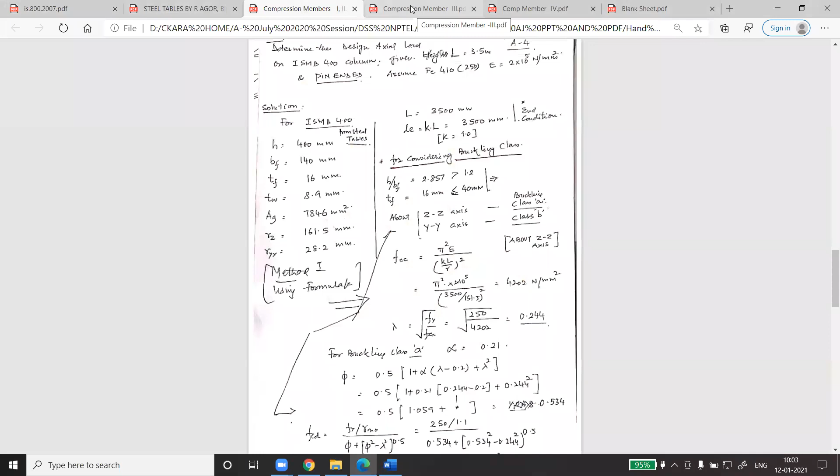So yesterday we had done one numerical, so we'll try to cover one more today with a little bit of variation you might come across while doing the questions. So a little recap on the things we had done yesterday. The screen size, is it okay right now, or should we make it bigger? Zoom it a bit, sir. How much? How about now? Yes sir, it's okay, okay.

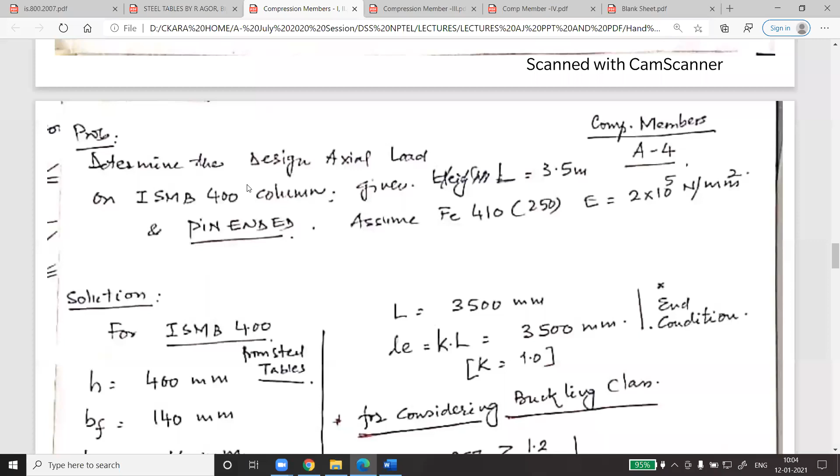So we had done one simple numerical yesterday, and in this numerical, the column was given to you, this isolated, independent member. Length was given to you, end condition was given to you, and the type of steel of which the member is built was also given to you, right? So we had to calculate this one, axial load, right?

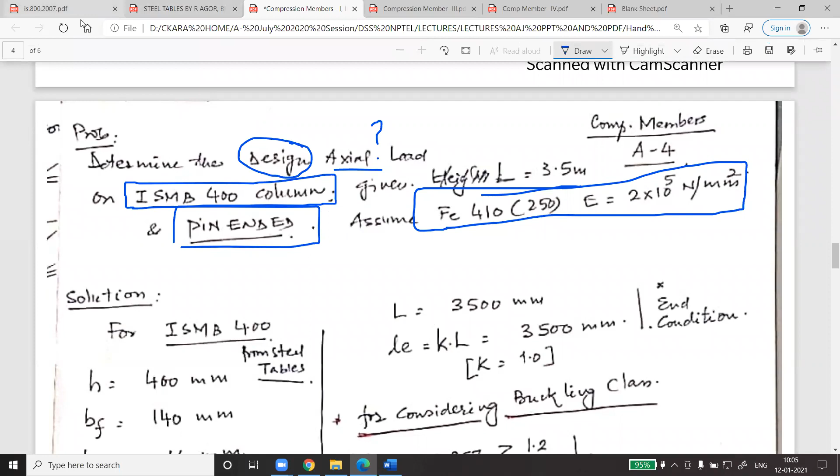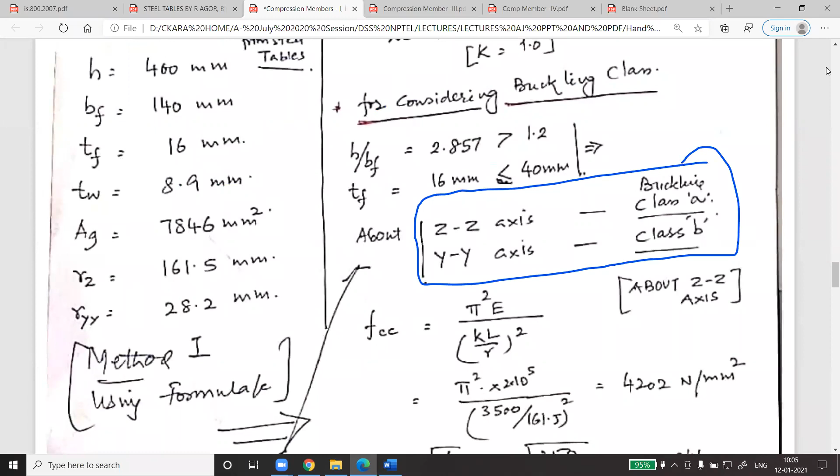So we had done this question using two different approaches. One was the analytical, and the second one was using the tables that we have at our disposal as far as IS 800-2007. Keeping the same guidelines, let me make it very clear, because whenever we are to find the design axial load, meaning the load carrying capacity of any member, we need to define the class of that section, right? This is the basic underline. Unless we define the class, we shall not be able to find the design axial load, because we have to refer the relevant table, right?

So to define the class, we need to define about what axis we need to find it for. For z axis, the class could be different, for y axis the class would be different. So we have to consider the minimum radius of gyration, right? If you see the code, there are two radii of gyration mentioned: one is along the z axis, and another one is the y axis. So we have to consider the minimum.

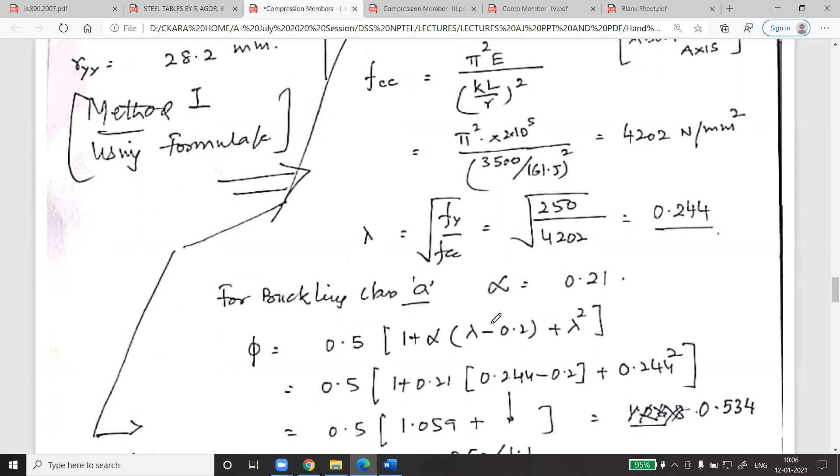We can calculate directly from the steel table. But the question that we are going to do today is a built up section, so this is the question that we are going to solve today.

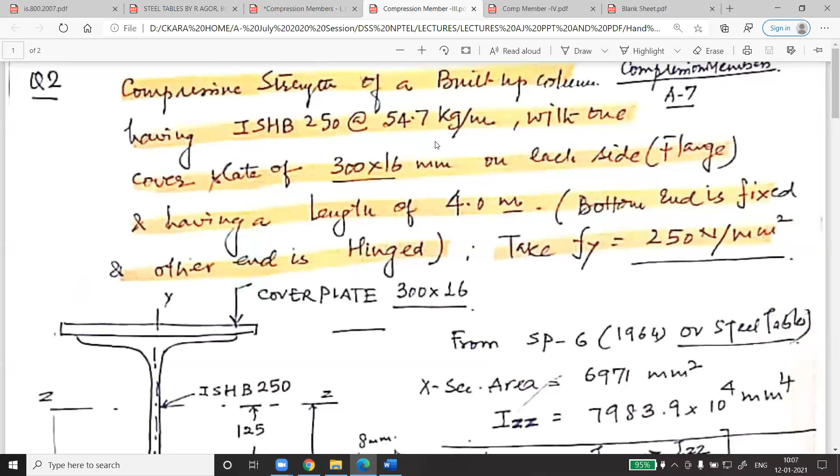The fundamental question remains the same, that we have to find the load carrying capacity of a built up section. So this is the built up section.

What is there in the built up section? This is ISHB 250 at a rate of 54.7 kg per meter. Sometimes there are two members given in the steel table, so we have to refer which one it is. That's why this weight is mentioned here.

So if you look at the steel table, I am opening up the steel table for ISHB 250. You can also open it up if you have it on your table. ISHB 250.

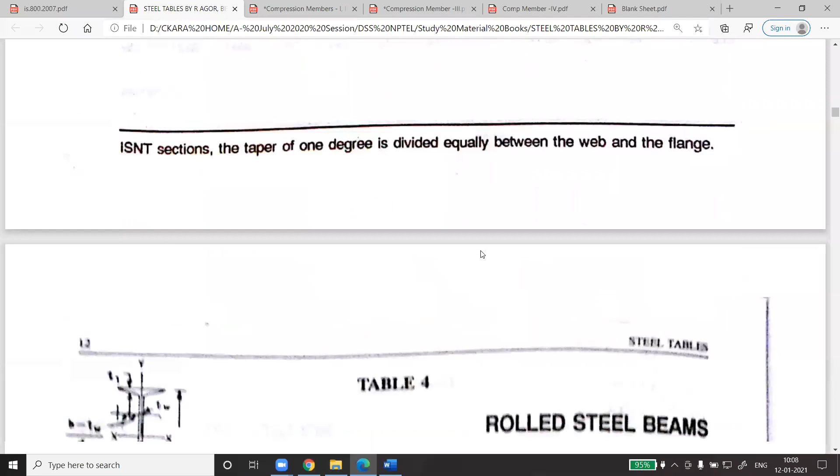Angle is given, and then the T sections are there. Then after that is the I section, right? From this I section, you get the ISHB 250. So ISHB is here. If you look at this table, there are two entries. One is this one, and another one is this one. So both are ISHB 250.

So which one of these two do we have to refer? It is defined by this 54.7, and this is what is given in the code. So we have to be following all the properties along this line for this ISHB 250, this one. That was the purpose of mentioning this weight. Clear?

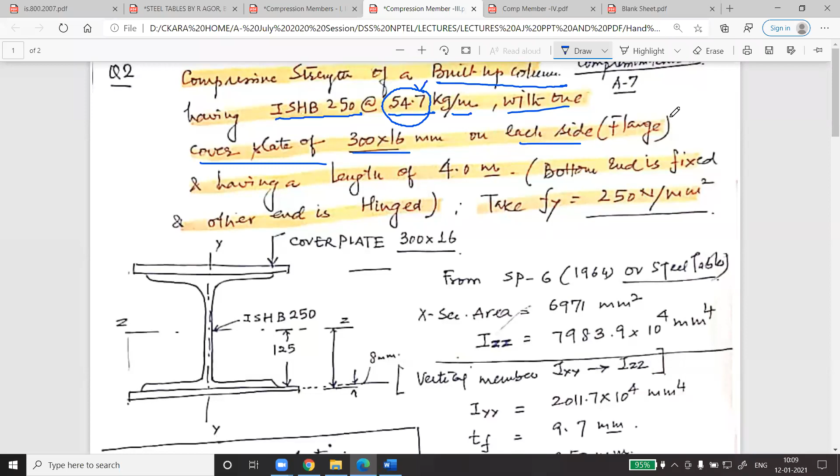Because it's a built-up section, first of all, try to understand the question itself. With one cover plate of 300 into 16 mm on each side of the flange. So you can see the figure here.

This is the ISHB, this blue one, I am shading it. And there are additional two members, that is in the form of cover plate, and these are the cover plates. This is yellow one, I'm marking it. This is the cover plate at the top of the flange, and another one is at the bottom of the flange.

So what is the variation in this question? Now we cannot get the value of RYY or RZZ directly from the steel table. We can get the value of steel table RYY for ISHB 250 only.

But because it's a built-up section, we need to incorporate the thickness of the cover plate, one on the top and one at the bottom. So definitely the dimensions have changed, and the moment of inertia will be different, and of course then the value of RYY will also be different. So this is the variation. Any questions? Have you understood the variation?

And it would also help us in defining the class of the member. But to find the radius of gyration, because when we are doing the questions, if we go to the steel table, table number 9, A, B, C, or D, we need to have the value of KL upon R. And R is the value which is minimum we have to consider.

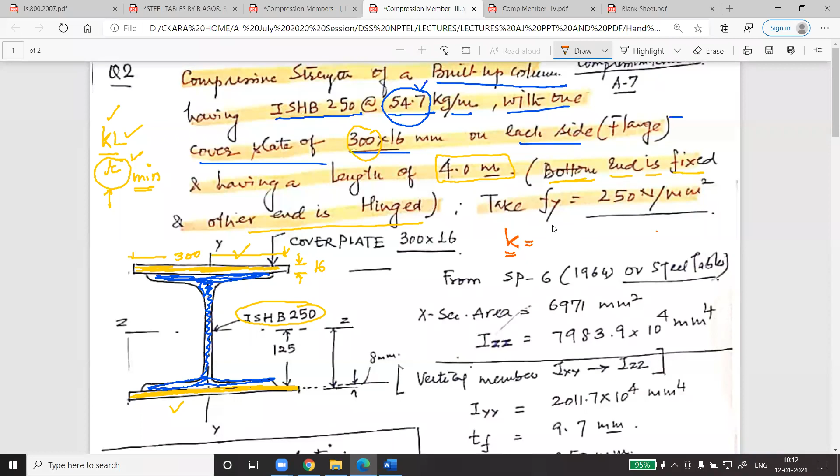Table number 11 को खोलने बेटा. What page? 45. Right. So this is the table.

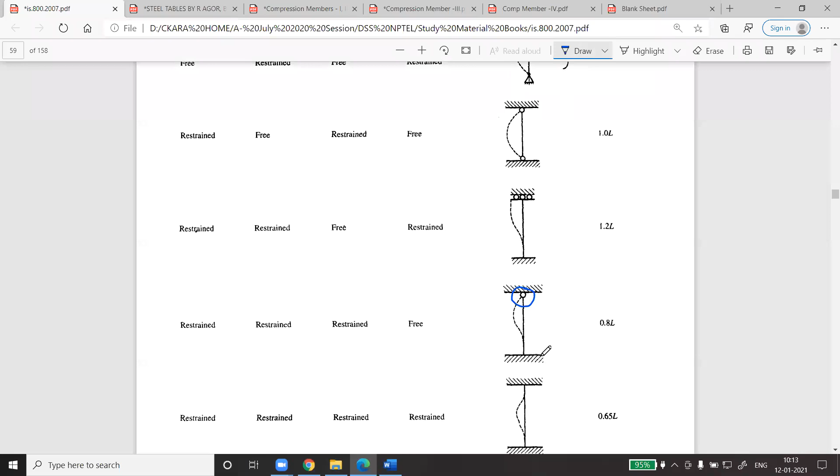One end is fixed, another end is fixed, pinned. So 0.8 L, this is the pin condition. This one is fixed condition. So we are following this one, right? So the value of K is 0.8, right? So this is defined. Now coming back to the question itself.

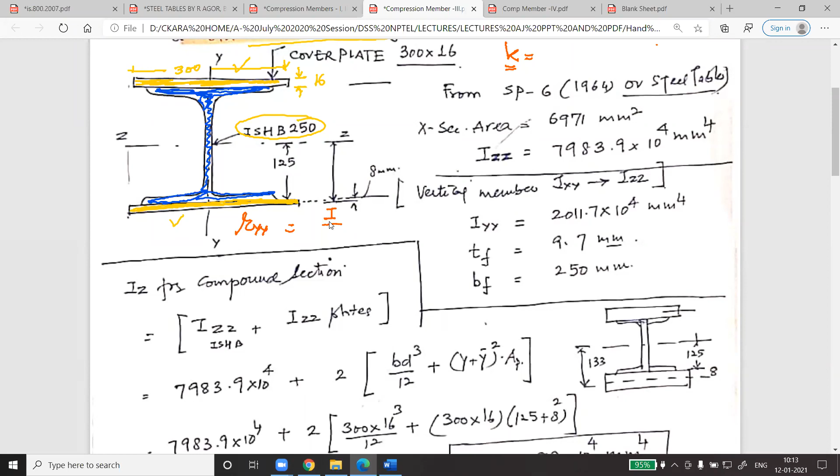So get down the properties, the basic properties of the I section from the table. So what we need to calculate is RYY, and RYY is the moment of inertia divided by... आप पुराना फार्मूला याद करें. This is the relation, right? RZ भी calculate करेंगे. RY will be equal to IY divided by area of the combined section. So this will be the formula.

As to calculate RY or RZ, so we need to calculate IZ and IY, right? दोनों में से जो minimum होगा वो हम select करेंगे. Got it?

So this is something, some practice that you have done in previous classes, maybe in +1, +2 as well, or maybe in engineering mechanics in first semester or second semester. So we have to find the IZ of the compound section, right? So this is the only variation. So once we are done with the RY or RZ, we can follow the relevant table and calculate the value of FCD, right? Clear?

So how to find the IZ of the compound section? IZ for the compound section is IZ of the ISHB plus IZZ of the plates, because it's a combination of both the members. So IZZ of ISHB from the steel table is 7983.

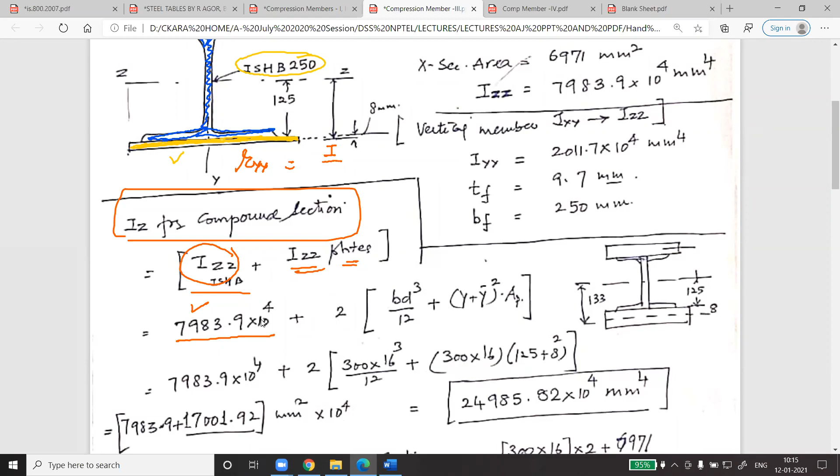This one you can get it from the steel table. So can you verify? Somebody can verify from the steel table. Is it right? Of course it is right, but somebody should check it. It's right, sir. Okay, there's some difference in the steel table. If you look at the steel table, the value is written as centimeter to the power 4, yeah, centimeter to the power 4.

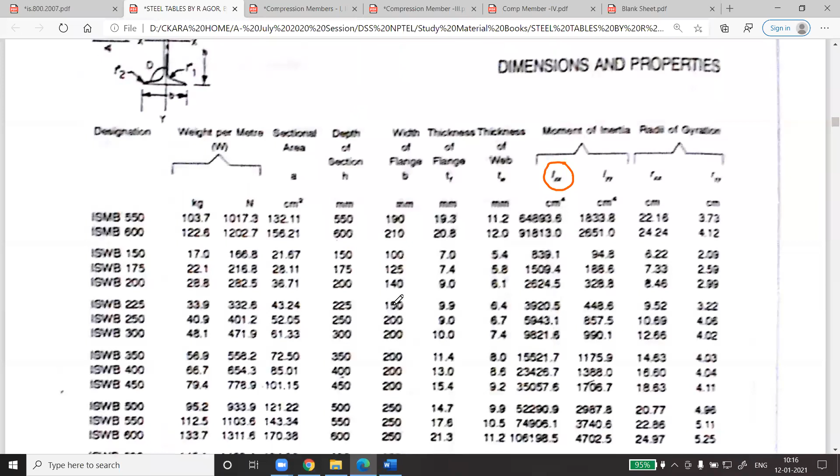Another difference is... मेरे इसमें क्लियर नहीं है, what is this? About x-axis. This is x-axis, right? So we are reading it as IZZ because the column is in vertical position. The column, this one is vertically placed like this.

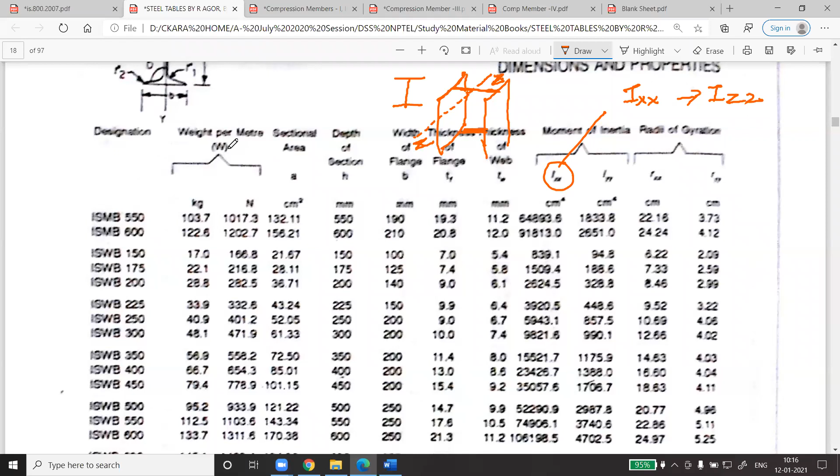So this column is in vertical position. So this one is, as per the figure, it is x-axis, but we are reading it as z-axis because the column position is anyhow. So I just mentioned to say that ix is the IZZ, right? Because the beam is not horizontal, the beam is being used as a column that is in vertical position. So that is the difference.

So IZZ of the steel member is this one, and IZZ of the plate. So can somebody explain this one, or are you clear with this? So we have used one theorem, that theorem says... what theorem is it? If you remember the engineering mechanics or some lecture in maybe +2 or +1, maybe in matric as well. कोई recall कर पाएगा? Anyhow, this is theorem of parallel axis.

You might have read it somewhere, that theorem of parallel axis and theorem of perpendicular axis. So we have used theorem of parallel axis here. It says that moment of inertia of this plate, Z1, right? There are two number of plates because एक top पे है, एक bottom पे है. The moment of inertia of this rectangular section is BD cube by 12. I think this is clear to you.

And plus... सर क्लास चल रही है, मैं आपको करता हूँ कनेक्ट.

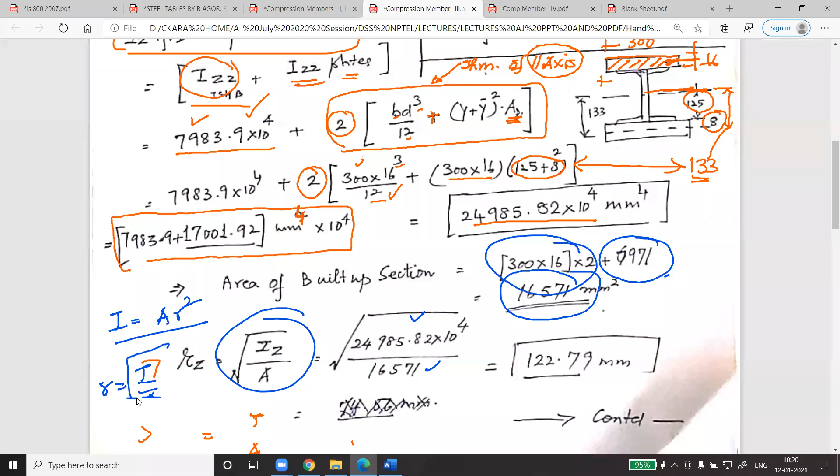Right? So by using this basic knowledge that we have, we have worked out the Izz according to z, the I value of Iz, right?

Similarly, we will be working out the value of Iyy, right? So the Iyy is this moment of inertia of the I section plus moment of inertia of the plates about y axis, right? I'm marking it here. There's a plate here, there's another plate here. To humne ab yy of both the axis is same, both the members is same. Yy jo column ka hai wo bhi yahi se pass ho raha hai, marking it in yellow. To yy jo plate ka hai wo bhi usi position pe hai, marking it in green.

So there is no distance between them, right? So simply we add the value of, now this becomes db cube by 12 plus jo pichhle usme kiya tha humne ax plus x1 ka square kiya tha wo zero ho jayega, right? Ye zero hai because there is no distance between both the axes. So simply we calculate this one and the value is coming out to be 9211.7 into 10 raised to 4 mm4. Then we calculate value of ry, coming out to be.

74.56. So now this was the only variation that was there based upon the things that we had done yesterday. Agar kisi ko kuch clear nahi hai to one can ask before I move forward. Baaki question same hai jo humne kal kiya tha.

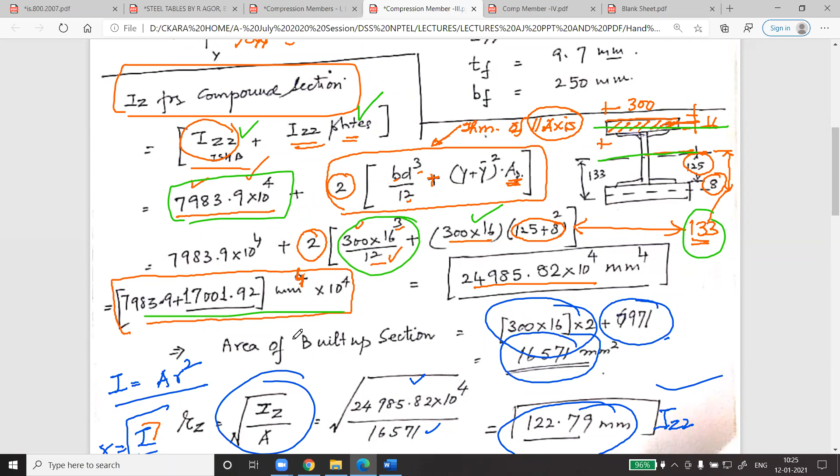To isko calculate humne isliye kiya hai kyunki we need the value of r is the radius of gyration. Radius of gyration is given by moment of inertia about that axis divided by the total area of that member, right? The total area of the member is this one, area of the section I section plus area of both the plates. Dono ko total karne ke baad jo value aayegi that is coming out to be 122.79. So similarly we have worked out the value of I, that is moment of inertia about y axis.

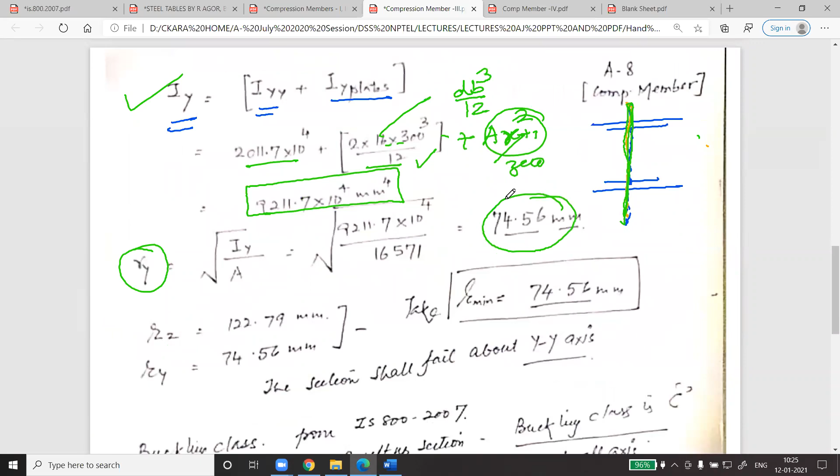74.56, right. So now we have done this because we need to find the buckling class and the value of KL upon R. If you see the table, buckling class table to define, we saw this yesterday, this is the table. So if you look at this table, this table defines the buckling class of the cross sections.

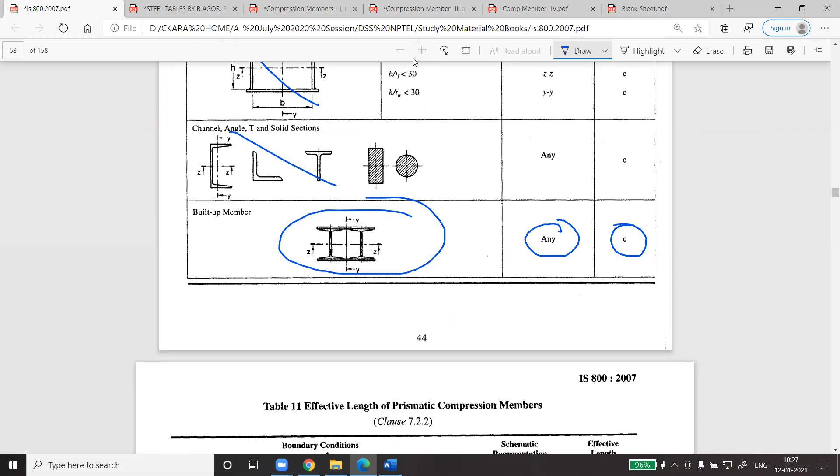So our section is not a single standalone section, not a welded section, not a hollow section, not a welded box section, not a channel section. So what we are talking about is a built up member. For built up member about any axis, we need to see that this is class C, right. So as per table 10, we have defined that class of the member is C.

Clear. So once we are done with the class, then according to the class we can go back to IS 800. Then which table we are to follow? Page number 35, table 7. No, we need to follow this one.

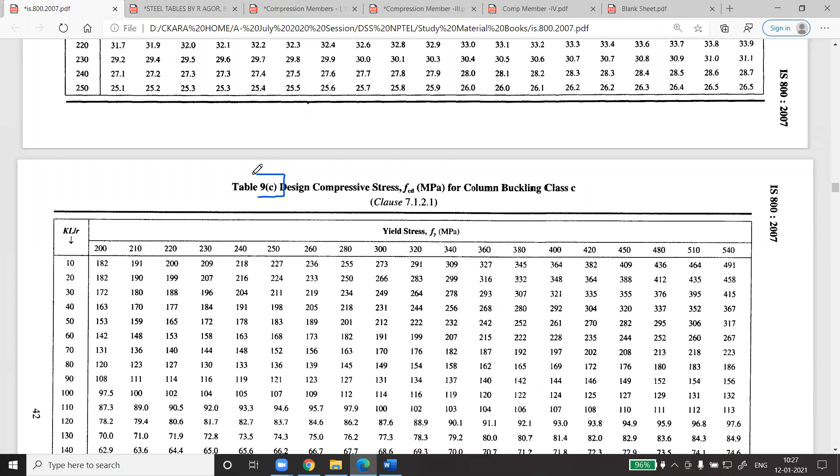In table number 9C we need this value, right, that's why we have calculated the value of R. K we have seen, K is 0.8, L is 4, right. R is what we just calculated, 74.56, right. So based upon this value we calculate this KL upon R, right, and this value is coming out to be 42.92.

Clear. So this is KL and this is R. So KL upon R, and this value is coming out to be 42.92. So this is the value according to which we have to follow this table.

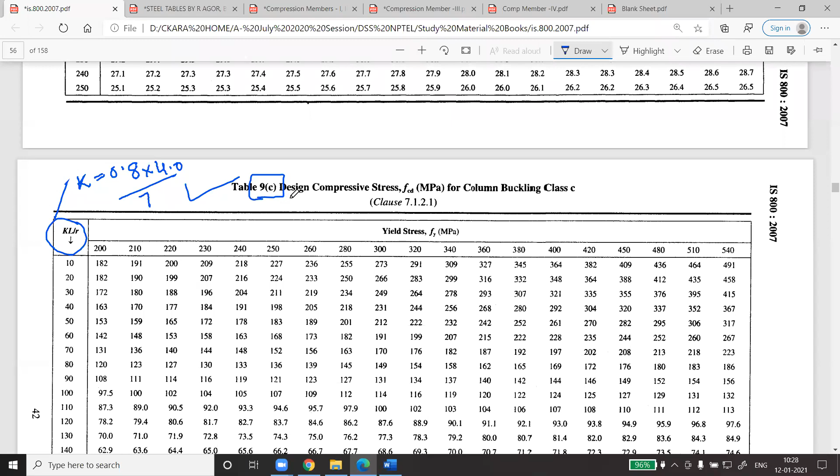We use table 9C because our class is C. So now the KL value we have calculated is 42.92. So 42.92, this value is coming somewhere here. Because our steel's yield stress is 250, we have to follow this value and this value, so our value will come in between.

If it's 40, it's 198, if it's 50, it's 183. So we have to interpolate, right? So we have interpolated. After interpolating, this is the value. For 40 it is 198, for 50 it is 183. So our value by interpolation comes out to be 193.62. So this is the value FCD, right?

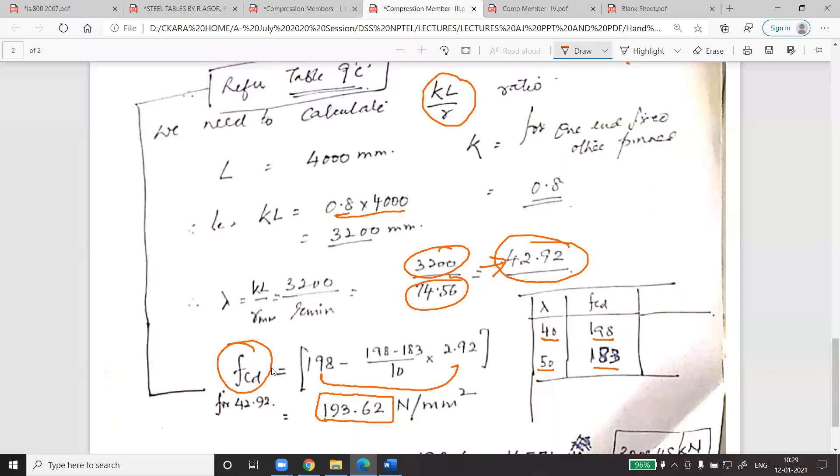We have to find FD, the total load carrying capacity, compressive force. This is FCD multiplied by area, and this is FCD. This is the total area of the member, and this load carrying capacity is 3208.48 kilonewton. So very safely this member can take 3000 kilonewton load.

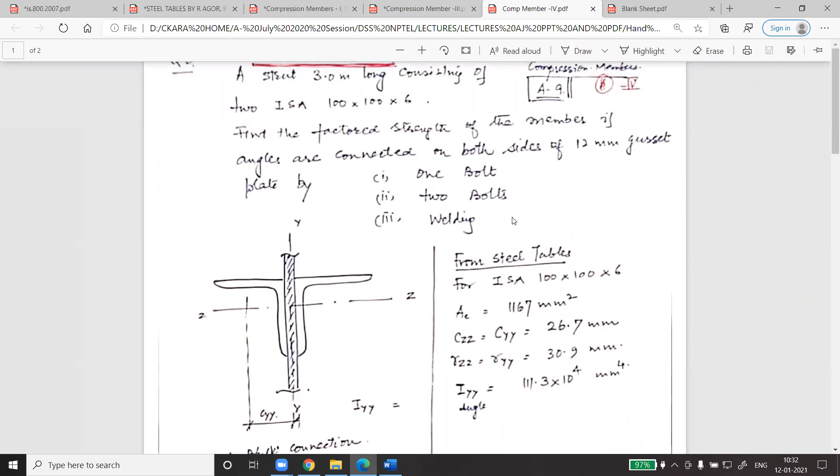So we are moving to the third option as per your code, and this is another question we will be doing. Can somebody read the question for me? A strut 3 meter long consisting of two ISA 100 by 100 by 6. Find the factored strength of members if angles are connected on both sides of a 12 mm gusset plate by 1 bolt, 2 bolt, or welding.

I'll just give you the perspective of this question, because this is a part of a truss. In a truss, there is a gusset plate here. Let me draw this on a plain page.

This is an angle here, the angle is like this, and it is connected to a plate. Because when we talk about a truss, a truss is always connected with the help of some plate, and that plate is like this. This is a plate here, and this plate runs like this.

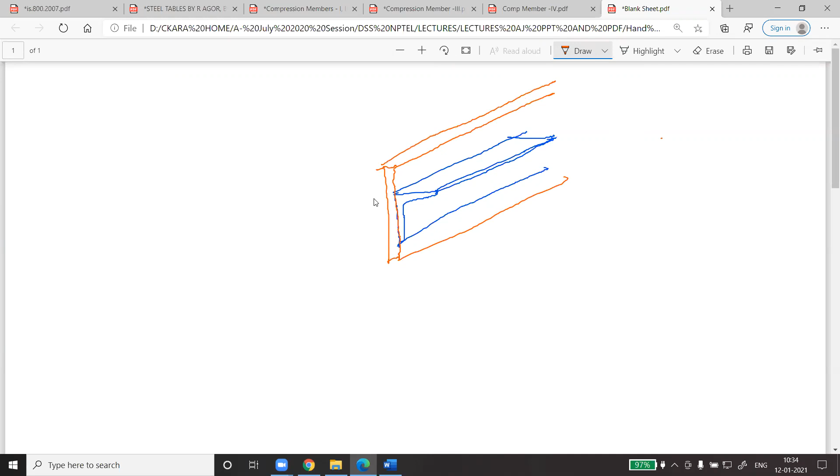The thickness of the plate - in this case, this is a plate here, and it is connected like this. We will attach it with bolts or do welding. So there is another angle on the other side of the plate.

Excuse me for this, I'm drawing it like this. So these are the two angles which are connected on both sides, and it is connected like this with 1 bolt or 2 bolts. There are three different questions given here.

Now read this question. The angle is 100 by 100 by 6, so the nomenclature of the angle is clear. Whatever property is required as far as the angle is concerned, Indian standard angle, we get it from the steel table. So the word written here is strut - a strut is a member which is under compression, part of the truss which is under compression. So it automatically defines that we are designing a compression member.

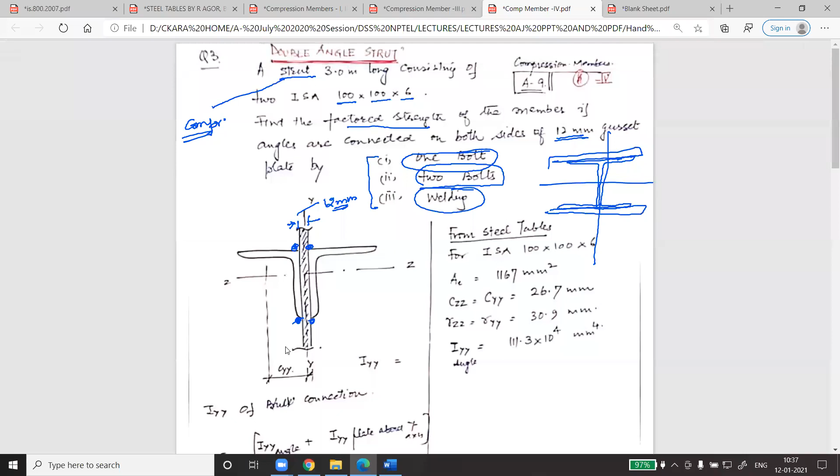So welding will be done here on this side along the length, and here also along the length. So these three conditions we have to analyze and design the load carrying capacity for all these three cases. So this is the question.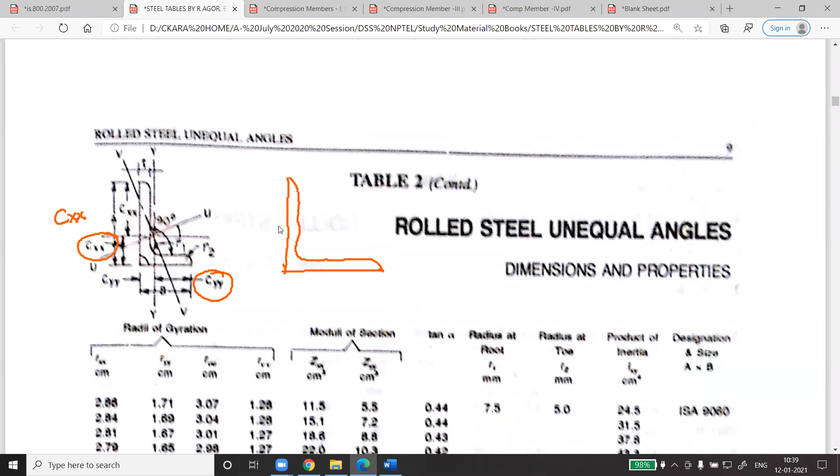So this value is CYY. This is CXX and this is CYY. Basically, it is the position of the CG. It is the position of the CG because this section, this leg is 100. This leg is also 100.

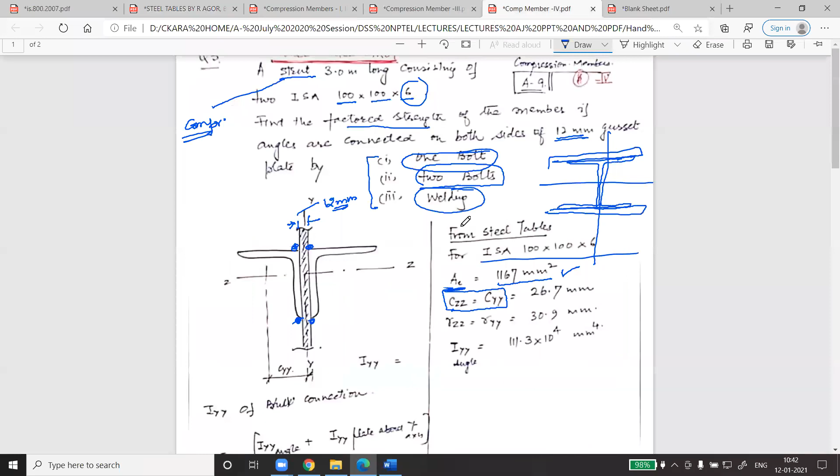Right, so we'll be following this line, these values. And the value of CXX and CYY दोनों बराबर हैं. So this is 2.67 in centimeters, so 26.7 millimeters. So because this one we need to use in the calculation, right? So this is 26.7. Then RZZ is equal to RYY. This is 30.9. Again, we have taken this value from the steel table.

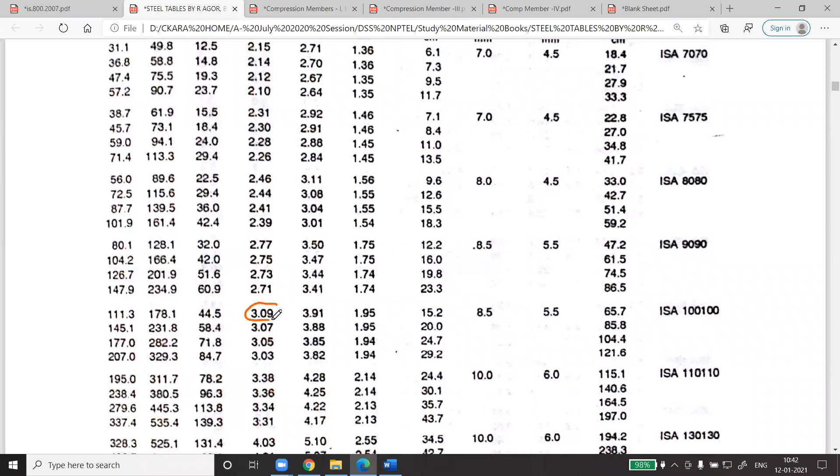Now you can verify RZZ. This is the value, 30.9. I need to say that you get the values from the tables, so you don't have to worry.

Get this value from table, get this value from table, and IYY of the angle. Sorry, give me 1 minute. So as we have done in the last numerical, that we have to find the IYY of the built up section, because this is again a built up section. There are two angles connected together, right?

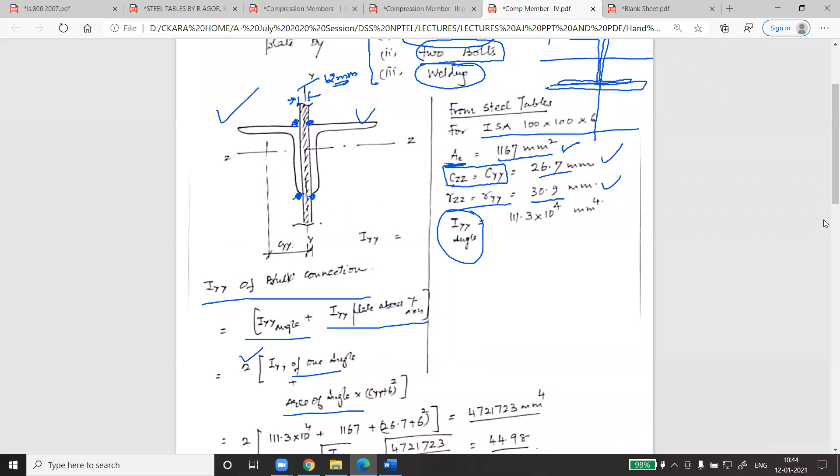So IYY of the angle and IYY of the plate about y-axis. There are two angles, IYY of one angle plus area of the angle times CYY plus 6 square. 6 is what? अब इसको ध्यान से देखें. इस एंगल का moment of inertia about y-axis is this, plus area of this angle plus area of this angle times this distance, this one.

So this is CYY plus half of the thickness of this plate, that is CYY plus 12 mm की प्लेट है तो 6 mm बीच में ऐड हो जाएगा, तो square of this. So this again a theorem of parallel axis we have applied here. So you find the total moment of inertia.

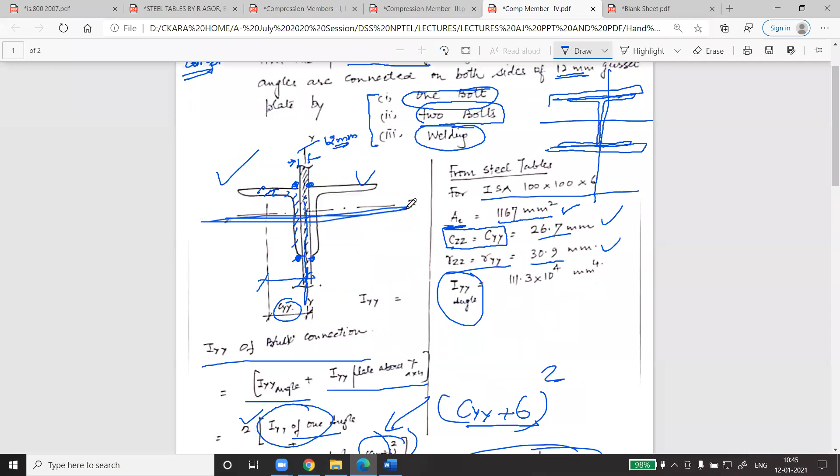This is coming out with this one, and this RYY, it is 44.98, because in vertical condition the RYY is minimum. We are calculating RYY is 44.9. RZZ, because RZZ में क्या है कि दोनों एंगल का एक ही Z एक्सिस है, राइट? तो RZZ दोनों एंगल का सेम है, so this is 30.9 directly from the tables, right? So minimum of these two is 30.9.

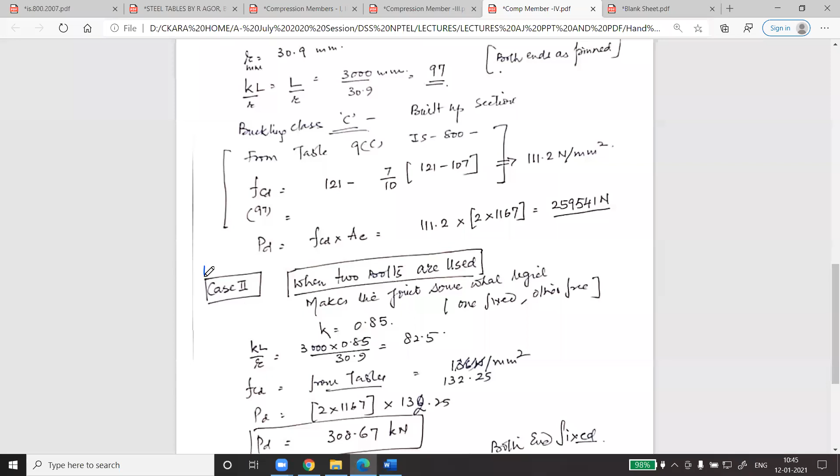So this is the same approach that we had done for the combined I section. So the variation in this numerical is, there are three different cases. Case 1, when single bolt is used. Case 2, when two bolts are used, and case 3, that is welding. So we'll handle it one by one.

So the purpose of defining single bolt is ये आपको याद रखना पड़ेगा. When 1 bolt is used, so this has to be considered as pinned end condition. This is the memory, yeah, you have to. So it has to be treated as the pinned end condition. So if it is a pinned end condition, then effective length is same as the actual length. The K is equal to 1, right? When K is 1, then this is KL becomes L upon R.

L is 3000. R is minimum जो हमने अभी calculate किया है. According to this, the value is coming out to be 97. So can somebody tell me that we are using buckling class C? So buckling सर class, आपने के लिए क्या बोला अभी? Both ends are pinned.

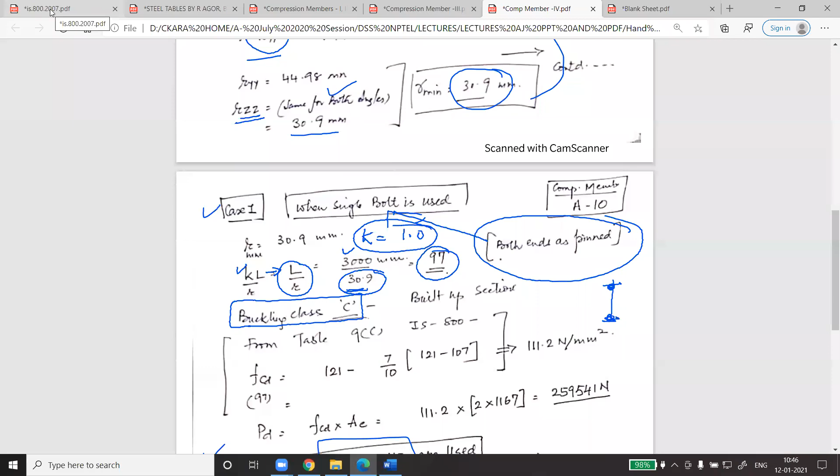This one. ये वाला. Right? Clear?

Yes sir. Right. So ये आपको जो याद रखना है वो ये कि when single bolts are used, because it gives a little bit taking of freedom of movement, so we are to consider it as focused on this single bolt pin. It has to be treated as pin. आवाज जिसकी आ रही है बेटा वो थोड़ा सा म्यूट कर ले. और I shall tell that who is making the noise. Okay.

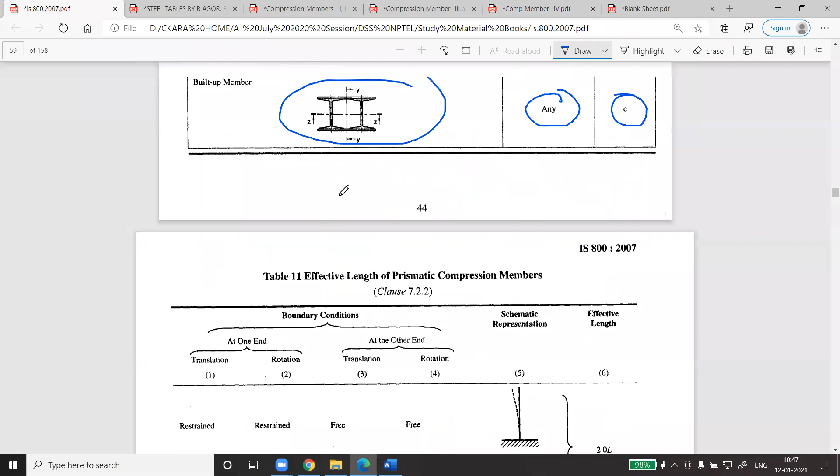So this is the only thing that you have to remember. Otherwise, the rest of the numerical remains the same. Right? So it is buckling class C because for all the angle sections, the buckling class, if you see that table number 10, so we are following this, right?

For all, this is angle, channel, T or solid section. So in this class, we are using this angle, and this is any and this is C, right?

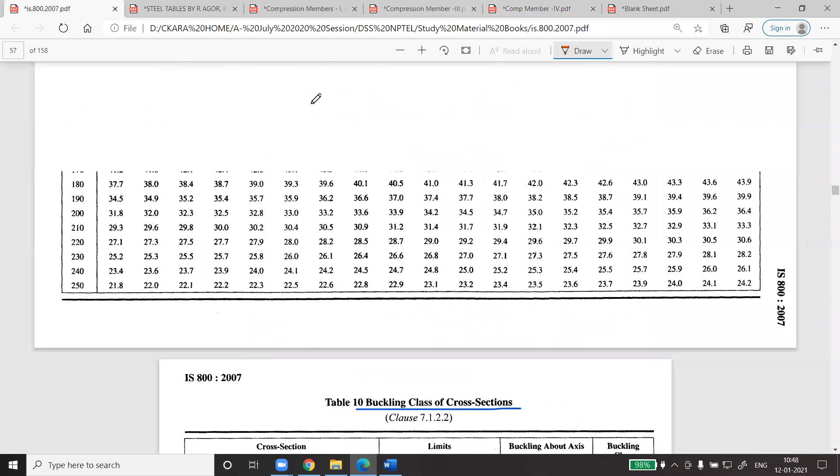So according to this, we have defined the class. So we follow table number 9C of IS 800, and as per 9C for value of 97, go to table number 9C. The value of 90 for 250 is 121. For 100, this is 107. Again we do the interpolation for 97 and we get the value of 111.2 Newton per mm square.

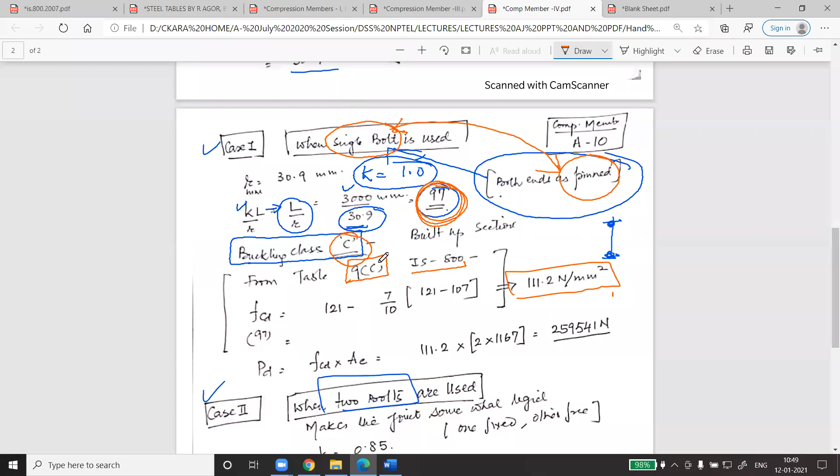So the same formula multiplied with the area gives you the load carrying capacity of the first case. In the second case, when two bolts are used, you have to consider it as one end is fixed, other end is free.

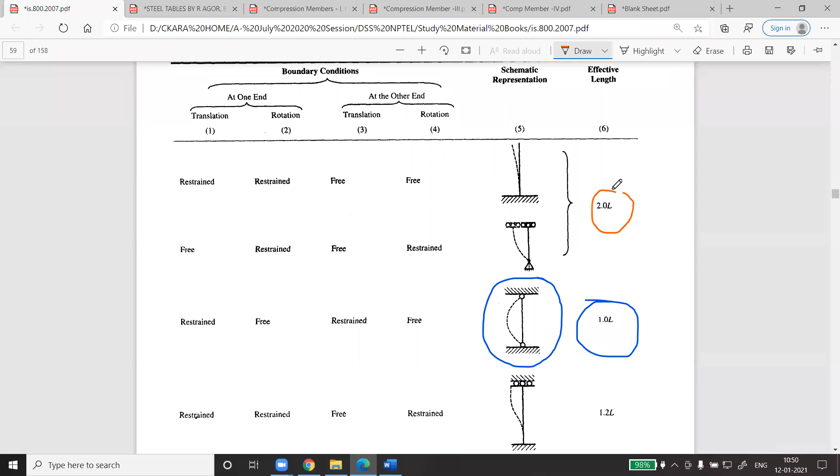So again, this terminology you have to remember: when there are two bolts, we consider this equivalent to one end fixed and other end free. So when one end is fixed and other end is free, as per table number 11, the condition which has to be followed is this one, I think.

So you check it, this is wrong, only written here. So one end is fixed, other end is pinned. So you treat it like this, this is not free. You make the correction, I will do it, right? One end is fixed and other end is pinned, so the factor 0.85 is written here, but as per code it is 0.8. So you take the value of 0.8, not 0.85.

So using this there will be certain changes in the values, but the process would remain the same. 3000 multiplied by 0.8, and this is coming out to be divided by 30.9. This value will change a bit, but the process remains same: according to that you calculate KL upon R, then follow table 9C again and calculate the value. So the load carrying capacity is coming out to be 308.

So if you see this, in the first case the load carrying capacity was 259 or 260, and in the second case it is coming out to be 308. Now the third case, which is welded.

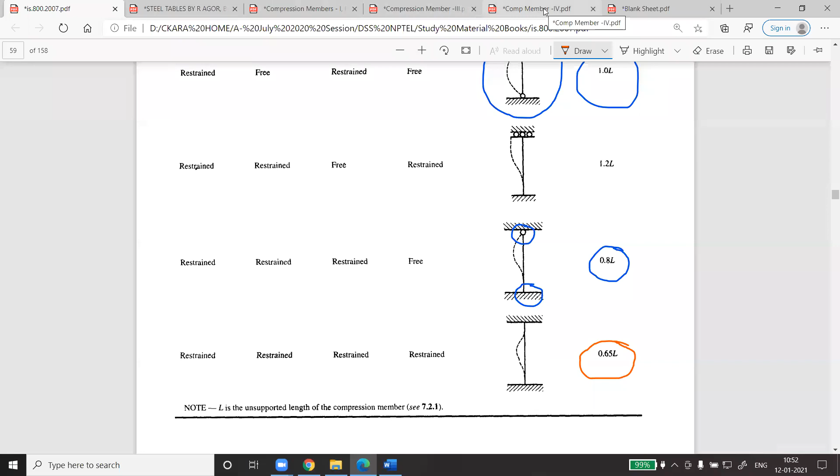In welding, the joint becomes fully rigid, so we consider this condition as both ends fixed. So when both ends are fixed, let me check, this is 0.65. Considering this value of K, the values of KL upon R will change. As KL and R change, FCD's value will change accordingly, and based on FCD, the load carrying capacity will also change.

So these are the three different cases. You see, there are three different cases. In the first case our load carrying capacity was 260. In the second case it was 308. In the third case it was 362.39.

So on this a question can be framed: if a joint is given to you, fixed with one bolt, two bolts, or welded condition, which of these three will carry the maximum load given the same dimensions, same member, but different end conditions? In that case, you have to remember that fixed end condition always helps us carry more load. So this is 362 — this is a direct comparison, and the question can also be reframed as out of these three, which will carry the maximum load.

So the variation in this numerical was only one: we had to remember that if it is fixed with one bolt, then we consider it as partially free and partially restrained, meaning like ends are pinned — in that case the value of K is 1.

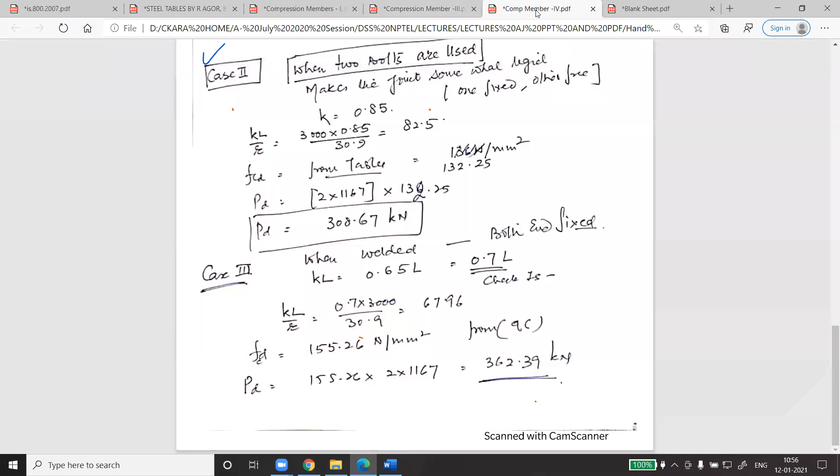Right, so I'll be opening another page here. Design of compression members, that's the forward process. That means the load will be given to you and we have to find what suitable section we need to decide, so that we are comfortable with the load carrying capacity which is given to us, right?

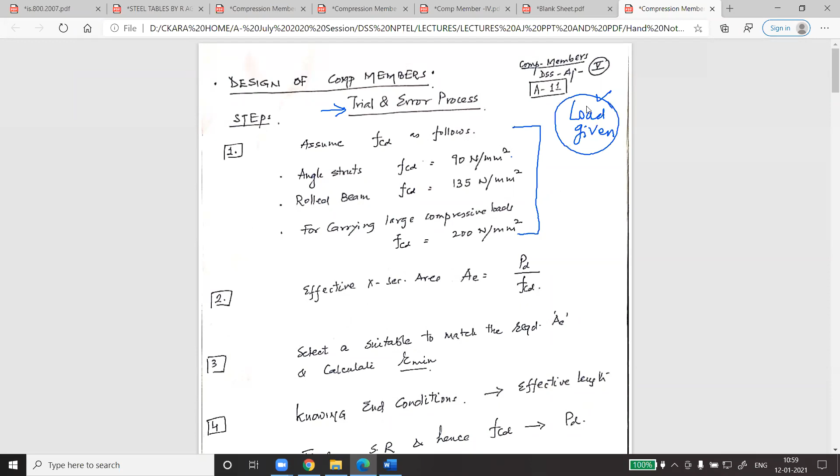So the first and foremost criteria, the question itself says that the load will be given to you, is given. This is the start, and we have to check the suitable section. That is the question. And third process is, if somebody remembers, whenever we do the design, the last step is check. So these are the 3 processes we have to follow. So this is the timeline, the flow process.

So the first step is assume FCD, because the load carrying capacity P that we need to find, that is FCD into area, right? So the area that we get will give us the suitable section. Very simple process - load is given, we'll divide the load with the FCD which we have assumed, so that area will be with us. According to the area, we can always choose the member from the steel table and then go for the check. As simple as that, right? Got it? So let me repeat.

So the first step is assume FCD, and there are certain experience-based figures that we can always start with. If we need to design for a truss member, we always preferably go for angle struts. Then FCD, we can always start with 90.

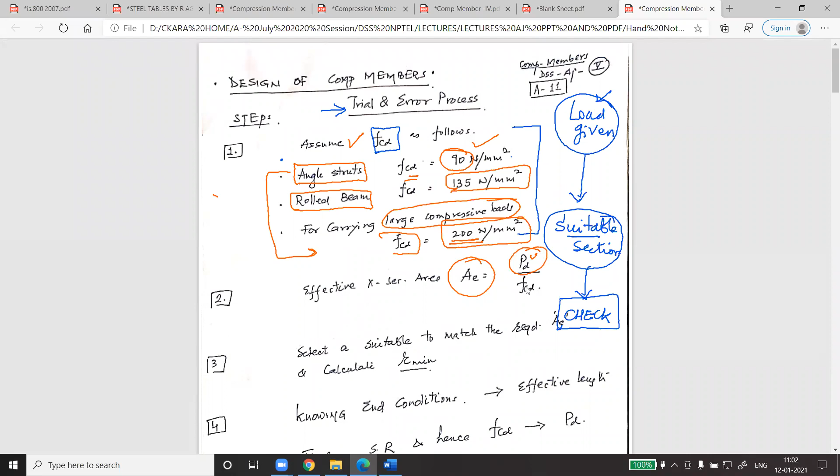So these are the three basic criteria. Once you are done with these assumptions, the basic simple funda is that whatever we have assumed, we have to verify whether our assumption was wrong or right. To find that, we go to step number 2, which is finding the area. Area is simply the total load given to you divided by the assumed stress. So this area will be with us.

Now going to step number 3: select a suitable section from the steel table to match the required area and calculate R minimum.

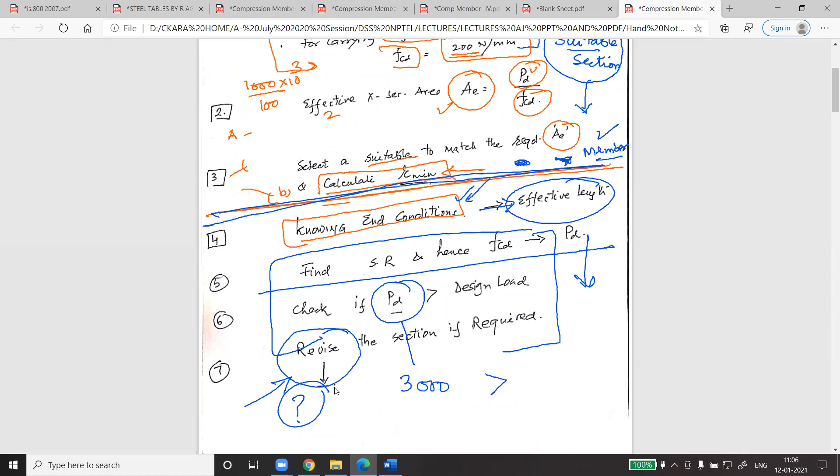So now we are moving to the numericals. All these steps will become clear to you. Again, read the numerical statement - someone should read it. Read it?

मैं आपको इसलिए नहीं कह रहा कि आप पढ़ नहीं सकते, मुझे लगता है कि आप मेरे सामने बैठे हैं, इसलिए मैं बोलता हूँ कि आप पढ़ें।

Design a single strut connected to a gusset plate to carry a compressive factored load of 180 kilonewton. The strut is 3 meter center to center.

अब इसमें 2-3 शब्द हैं जिन पर हम ध्यान नहीं देते। एक है यह factored load। कोई बता सकता है यह क्या है?

हम बाद में एक क्वेश्चन करेंगे जिसमें आपको गिवन लोड होगा, फॉर एग्जांपल 10 किलोन्यूटन। मान लीजिए यह एक रूम है, इसके ऊपर फ्लोरिंग और छत है। हर मेंबर का लोड कैलकुलेट करेंगे, इसका 10 किलो, इसका 20 किलो, इसका 100 किलो है। सभी लोड्स को टोटल करने के बाद आ जाता है 500 kg।

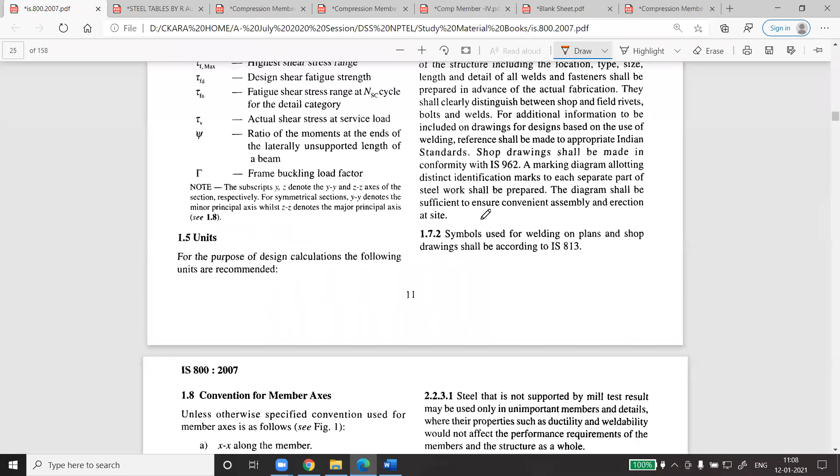Table 4. Yes, so we refer to table number 4, page number 29, this one, right?

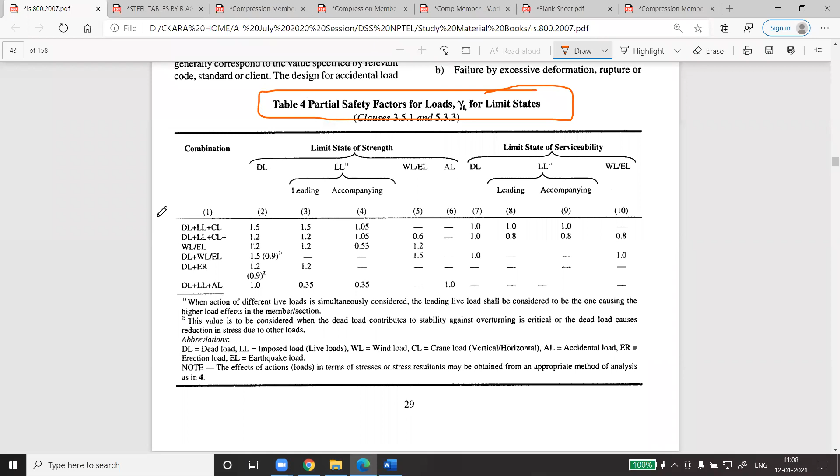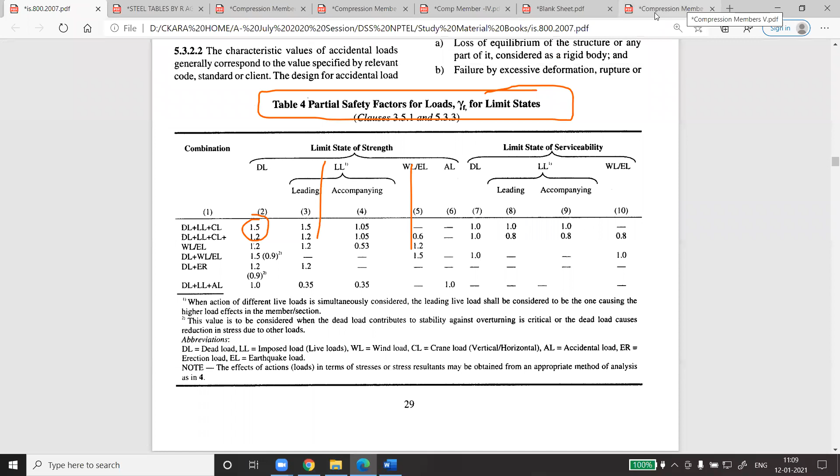तो पार्शियल सेफ्टी फैक्टर्स फॉर द लोड्स, मैं रीपीट कर रहा हूँ क्योंकि आपको एग्जामिनेशन भी देना है, ऐसे क्वेश्चन आएंगे। इसमें डेड लोड, लाइव लोड का फैक्टर 1.5 है, जनरल फैक्टर इज 1.5। विंड लोड एंड अर्थक्वेक लोड का अलग फैक्टर है। सो वी विल बी फॉलोइंग दैट। जनरली हर क्वेश्चन में factored word लिखा होता है, अगर नहीं लिखा हो तो वी अज्यूम दैट इट इज फैक्टर्ड लोड unless you are designing itself.

So this factored load is 180, so you do not need to apply any additional factor to increase it.

The strut itself means this is a compression member and 3 meter center to center, so step number 1, because we are designing for stress, we assume the stress FCD. कितना? 90, that was the step.

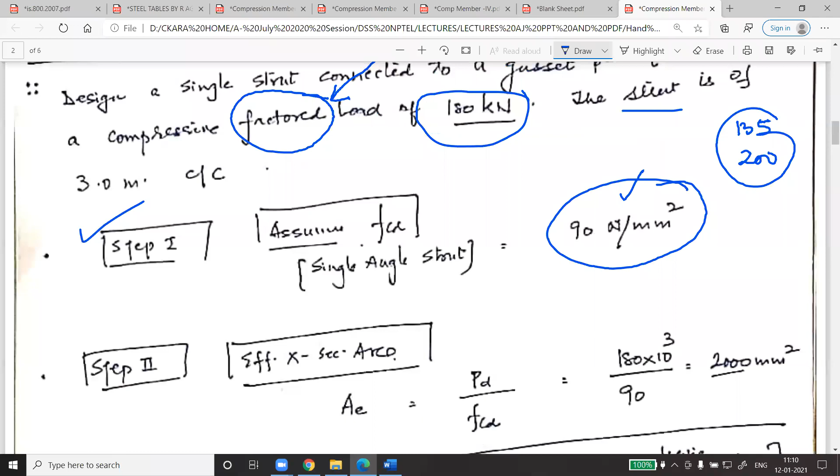बीम के लिए 135 था और हैवी कॉलम के लिए 200 था, तो अभी हम 90 ले रहे हैं क्योंकि वी आर गोइंग फॉर स्ट्रट एंगल्स इन अ ट्रस। सो इफेक्टिव एरिया इज गिवन लोड डिवाइडेड बाय assumed stress, 180 divided by 90, so the area which is required is 2000 mm square.

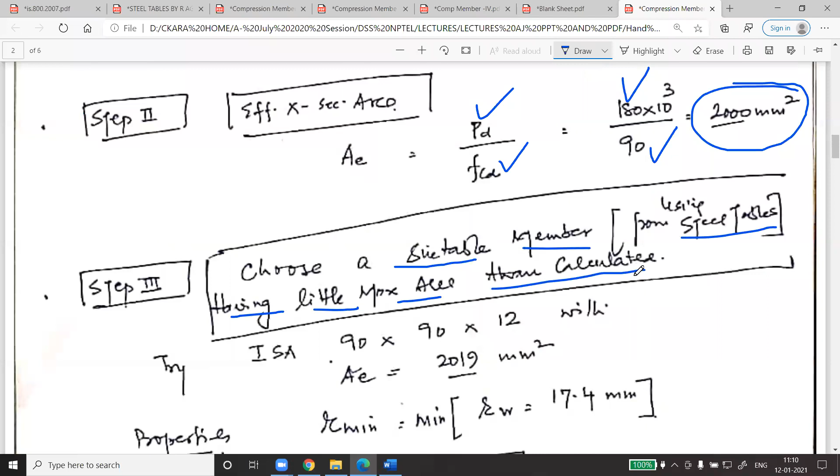So now the third step, जो अभी हम कर रहे थे, choose a suitable member from steel table having little more area than calculated. Little more area, little means not much, just matching with that but not less than, ये भी देखना है आपको।

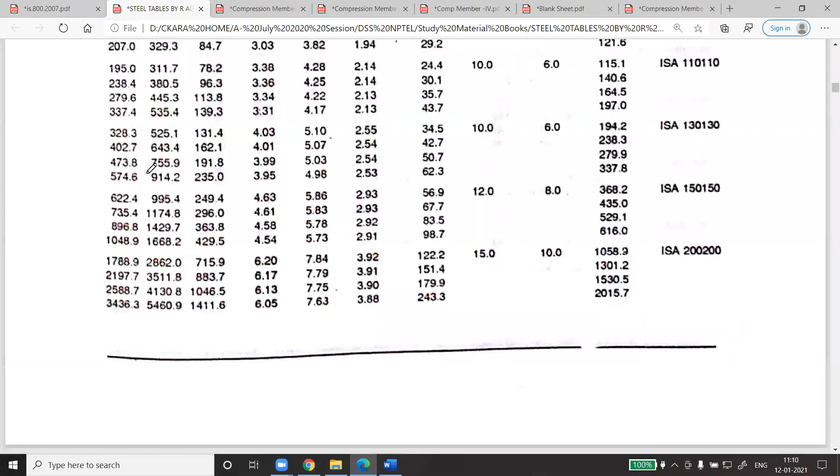सो आप स्टील टेबल खोल लें, विल सेलेक्ट करेंगे कि 2000 एरिया किस एंगल का आ रहा है। आई एम जस्ट ओपनिंग द टेबल हियर एंड दिस इज द एंगल हियर। सो ऑलवेज गो फॉर, preferably go for equal angle just to avoid the calculations। सो आई एम ओपनिंग द इक्वल एंगल टेबल्स हियर, दिस इज द फर्स्ट पेज।

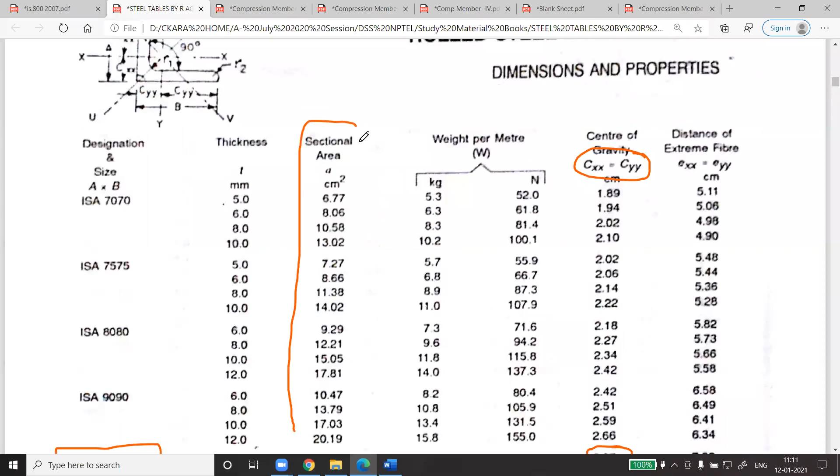तो आप start following this area column। हमें एरिया कितना चाहिए? 2000। Any one of this having 2000? 1300, 700, 800, 1100... it's the 9090 वाला, last one.

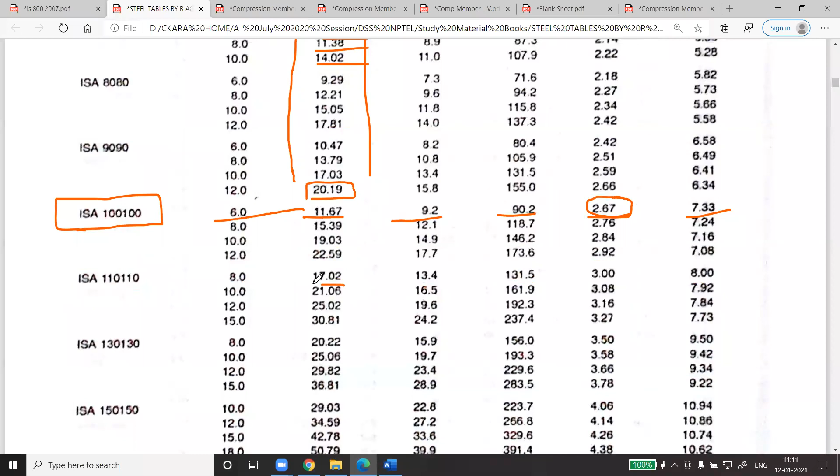Yes, ये last में sir 2019 है। This one is 2019, right? So there's no another nearest one, next one is this one, 2106, but this will make the section heavier, right?

So if you can go for a lighter one, because steel design is always a weight calculation, so we always choose the just comfortable section. So just comfortable is this one. So the section matching our requirement is 90 by 90 by 12, which gives us an area of 2019 mm square. So we have selected this. Coming back to that page.

So this is 2019 mm square, and properties from the steel table, we get the R minimum. R minimum is 17.4. So R value is given in the steel table.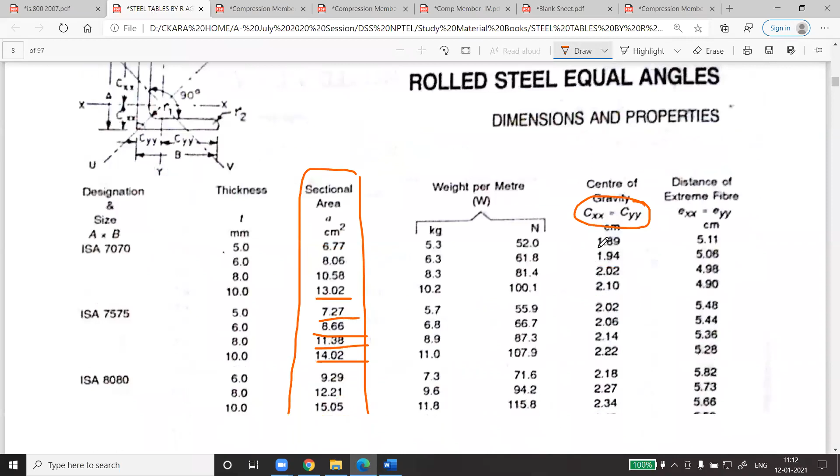कौन सा है ये? ISA 90 by 90.

Yeah, these are the values. So we choose 17.4 as R minimum. Then any conditions not given in this question, right?

I had written earlier that we can always assume according to the designer's flexibility. For connected with two bolts, as we did in the previous question, which condition will we assume? One fixed, one pinned - other one is pinned, right? The value here taken is 0.85, I don't know why.

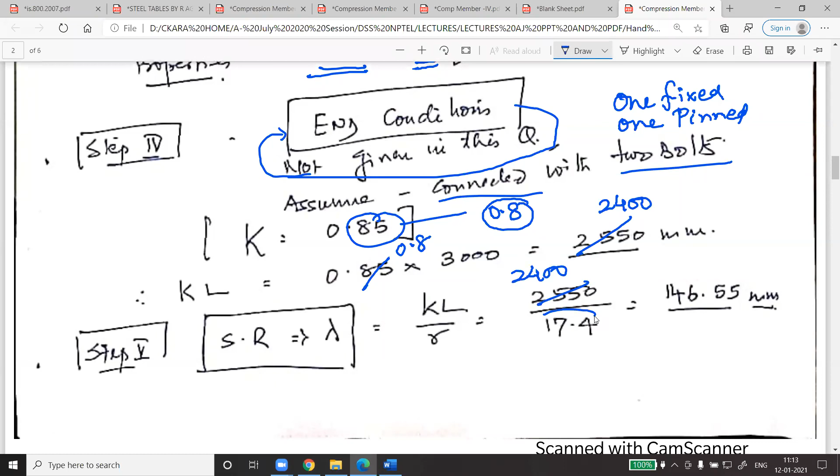This is 0.8 as per IS code, right? So we'll calculate with 0.8, this will be 2400. So KL upon R will be 2400 divided by 17.4. So this will be how much? Give me the value. 137.9.

137.9, right? So this is slenderness ratio. mm is not written here - this is also wrongly written because this is ratio, L upon R. So you make some corrections, because I will be sharing the raw notes with you. Note this down, mm won't be here. Since this is an angle, we'll follow the buckling table. So rest of the question remains same, right?

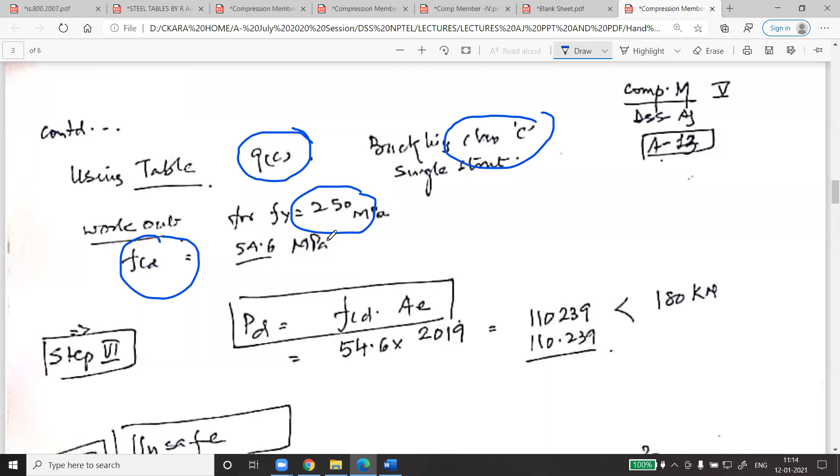So according to that, for 250, as per class C, the FCD which is to be found from table number 9C is coming out to be 54.6, right? So based on 54.6, this will change a bit because our KL upon R is 137.9. Anyhow, so accordingly our load will come out to this much and it is less than 180, right?

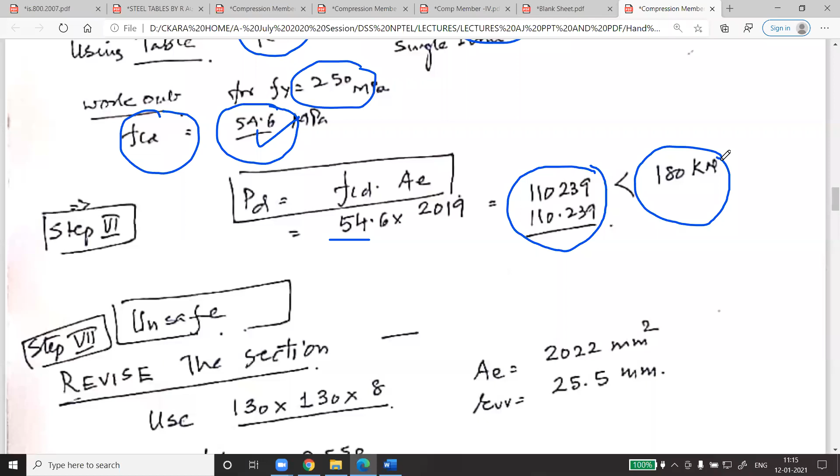So that means we opt to revise the section. Clear? So we have to revise the section. So now to revise the section, take a little bit heavier and go for another member which has almost the same area. So we have to calculate 2000 and go back to the table, and if you see this...

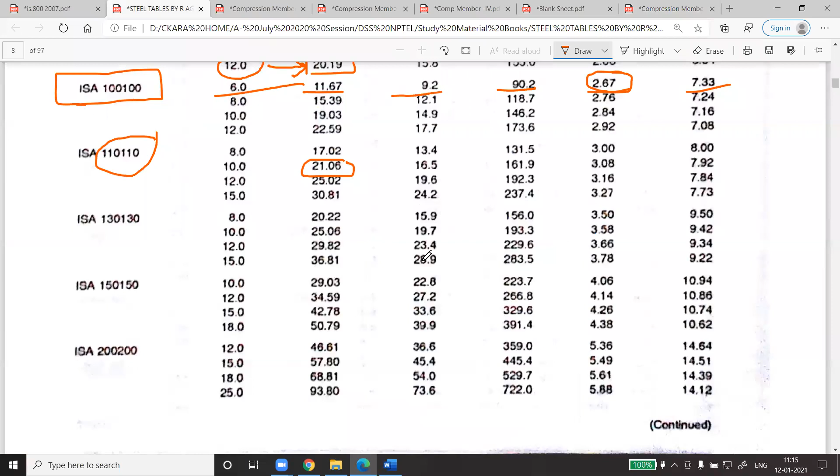This one, right? So this angle again has almost the same area which is required. So this is 130 by 130 by 8 having area 2022.

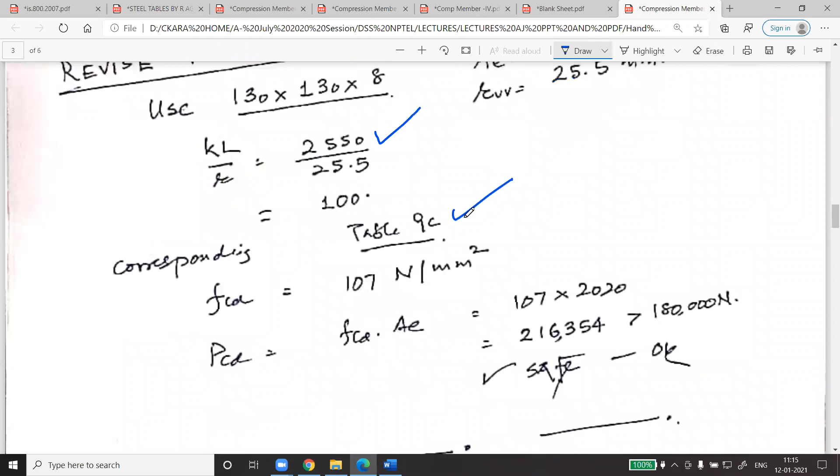So accordingly when we do the calculations, again follow the same process, then follow table number 9C, calculate the value of FCD, and now the answer is coming out to be more than 200 kilonewton, which is greater than 180. So our designed member is 130 by 130 by 8 with 2 bolts.

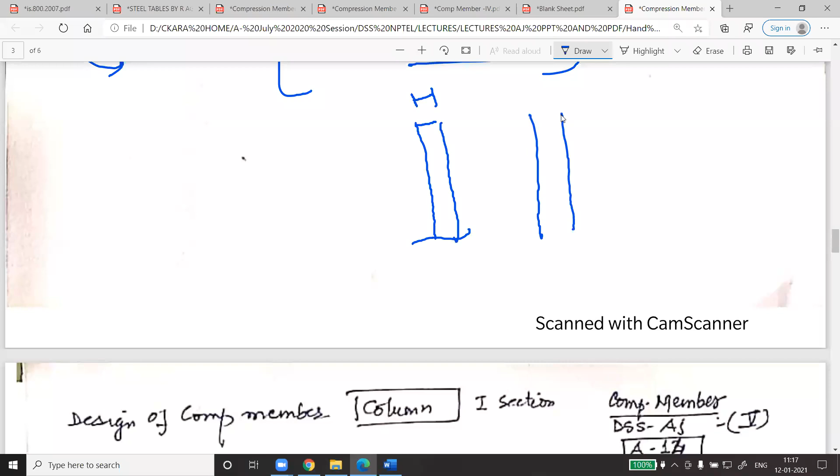So this is lacing. So this we will do tomorrow. What is lacing and battening? So why is it required? How do we do it? Then how do we design it? On this we will spend possibly 2 lectures, 2 will be used for this, okay.

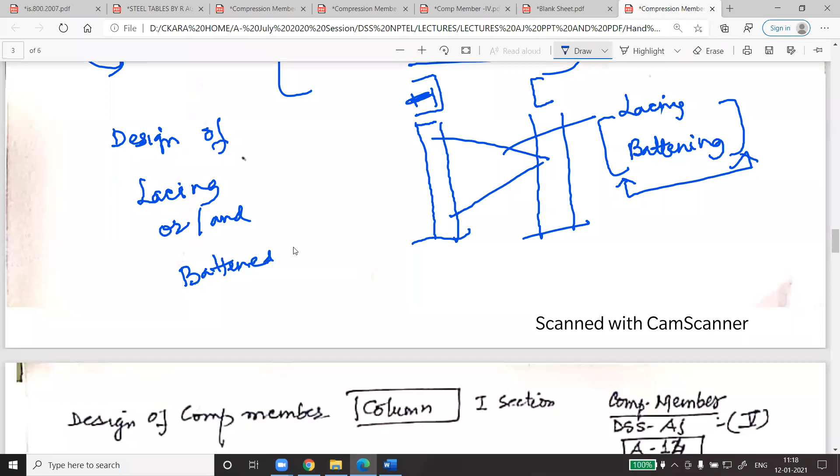Next 2 lectures will be on design of laced and battened columns. This is also part of compression members. So these will be done in next 2 lectures. So any questions from the topic that we have covered so far?